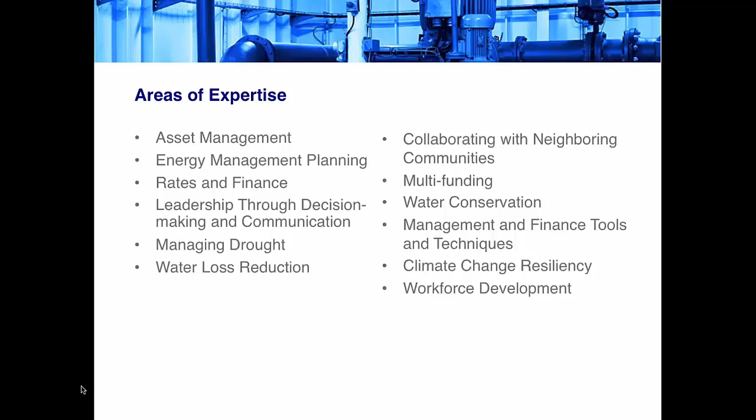The EFCN also has a small systems blog. You can learn more about water finance and management through this blog. You will have the opportunity to subscribe to this blog at the end of the webinar.

In addition to workshops, direct technical assistance, and webinars, as part of the Smart Management for Small Water Systems project, we are also creating a table that lists the major funding sources for drinking water infrastructure projects in each state and territory. Here's how you can access those tables.

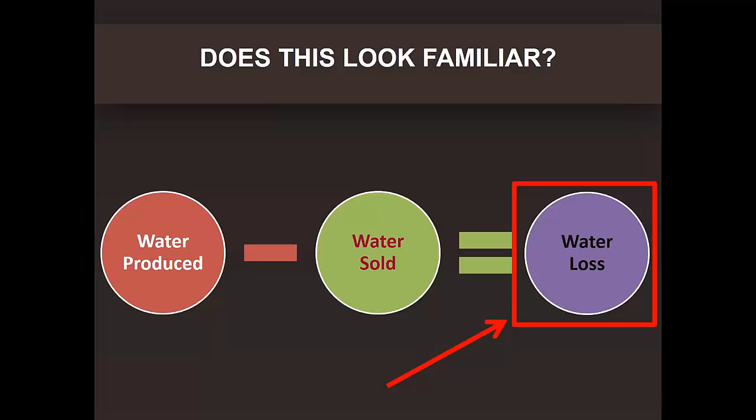So does this look familiar? You have water produced, you subtract the water you sold, and you get some value that is often referred to as water loss. The question is, what does that value actually represent?

There are 6 answers on the screen, from water leaking from pipes to unaccounted for water, data practices, etc. If in your mind you think that value represents unaccounted for water, we want to hope to dispel that from now on. We're not using that terminology anymore.

The water loss community has decided that what we really want to do is account for where all of our water is going and be able to deal with it. So don't think of that value as unaccounted for water, as that is now outdated and no longer used terminology.

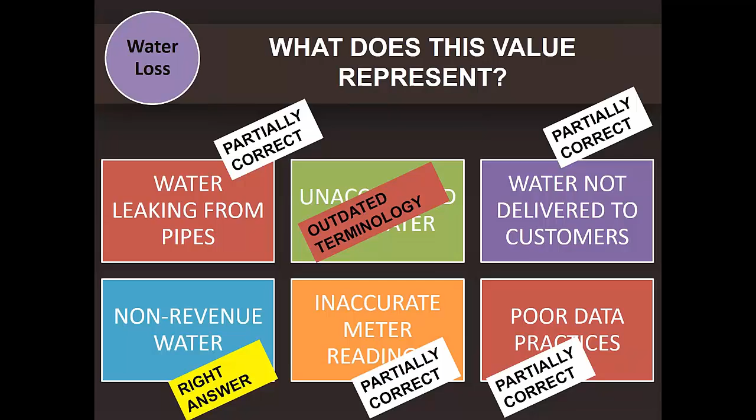Then there are 4 answers that are partially correct, because all of those are components of the correct answer, which is actually non-revenue water. So what we want to try to think about is when we take our water produced minus our water sold, what we really have left is non-revenue water, or water that we're supplying into the system, but we're not receiving any money back for.

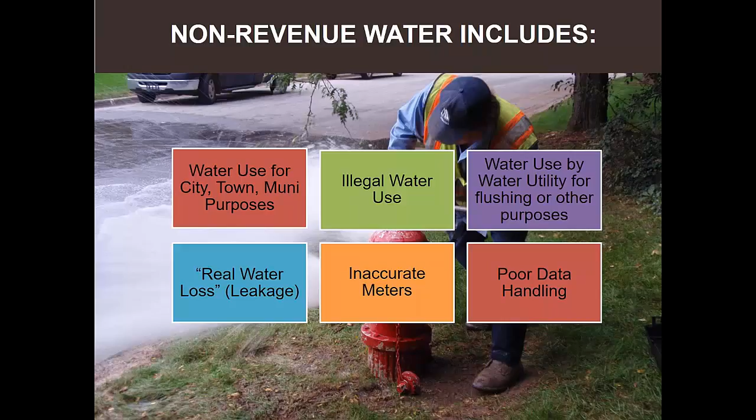So non-revenue water includes all kinds of things, like the water that you use for the city, town, or municipal purposes for which you're not billing, illegal water use, so people who are stealing water from your system, water use by the water utility for flushing or other purposes.

Also poor data handling practices, inaccurate meters, and then finally real water loss, which is actually leakage from pipes, overflow from storage tanks, or leakage from service lines. So non-revenue water includes a lot of things.

Now, why do we care about understanding what our non-revenue water is and where it's going and what category it's in? Well, a lot of that has to do with the fact that there are different tools, and in fact very different tools, that are applied to address different components of non-revenue water.

For example, if your problem is water theft, tools that address real water loss are not going to be effective. Or if your problem is inaccurate meters, again, tools that address real water loss are not the correct tool. So if you apply the incorrect tools, you may waste some money and you probably won't achieve the results you want. So it's really important for us to understand what non-revenue water is and what categories it falls in.

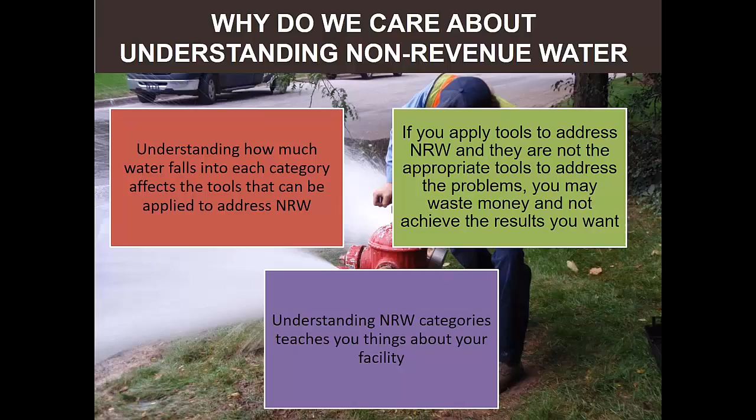There's one last reason, and it may even be more important than the other 2: when you start trying to understand where your water is going and what non-revenue category it's in, you're going to learn a lot about your facility. You can't really do this sitting in a corner and not talking to others at your utility, because it involves management, finance, and technical aspects of your utility. So you really need to learn a lot more about your utility to effectively manage non-revenue water, and I think that's as important as anything else, is the ability to learn about your system.

So what we see on screen now is a water balance, and this is balancing the water that you put into the system with the water that you take out of the system. On the left-hand side is our water supplied, and on the right-hand side is the water that we deliver and use within our utility.

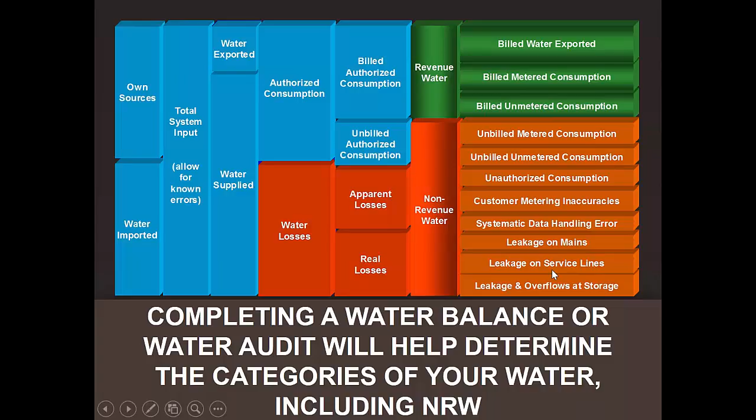If you look at the categories that are in green, those are the ones that generate revenue for the facility, and the ones in red and orange down at the bottom are the non-revenue categories.

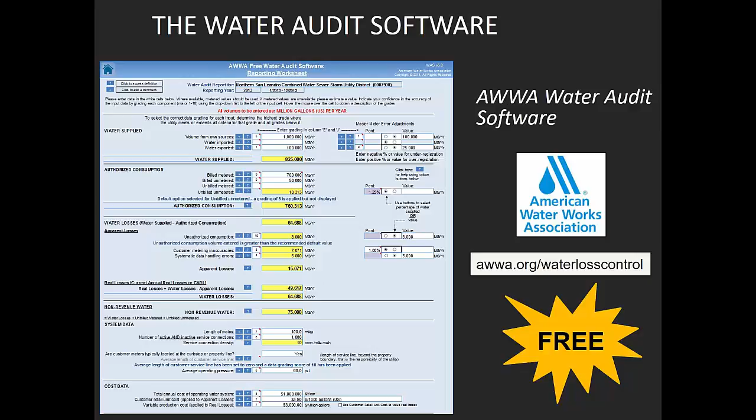Now the water balance in this format may look a little scary, but AWWA, the American Water Works Association, has created a water audit software that makes it a lot easier to figure out the components of your water balance. It's a lot easier to enter your data and information into their water audit software tool than it would be to actually complete the balance in the format I just showed you.

What's really nice is this tool is free on the American Water Works Association webpage. You can access it at awwa.org/waterlosscontrol, and you can download for free the latest version of the free water audit software.

Moving on to part 2, what data will you need if you want to undertake a water audit process? It might feel overwhelming, but if you break it into smaller pieces, it's not nearly as bad as it first appears. The data you need fits into 5 categories: water supplied, water delivered to customers, system characteristics, financial information, and other information that's nice to have but doesn't directly get entered into the water audit software. We're going to go into each of these 5 categories of data.

Today's focus is gathering the data. We have a companion webinar on March 22nd where we'll look at getting your information out of the data you have and putting it into the spreadsheet. Today's webinar will talk about the types of data you need to collect, and on March 22nd we'll talk about how you pull that data out of the information you have and enter it into the spreadsheet.

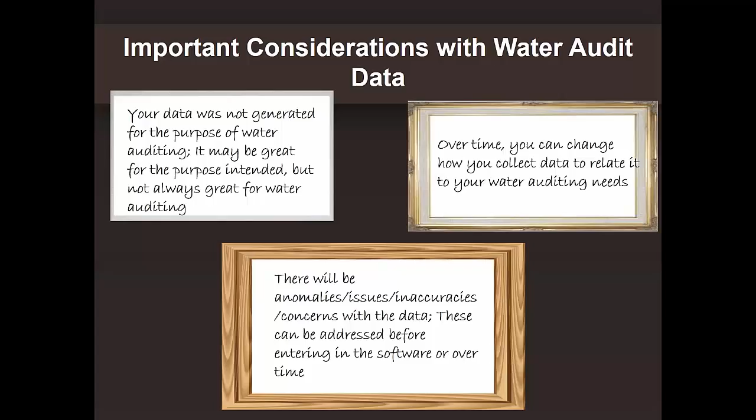Keep in mind that sometimes the data might not be in the format you want, and because of that there might be anomalies, issues, inaccuracies, or concerns with the data. You can address some of these concerns before you enter the data into the software, and others you'll have to address over time by changing the way you collect or use data. You may want to think about how to change the way you collect data to make it more related to your water auditing needs. The way you collect data now may be different in the future when you get more into water auditing. But for now, just keep in mind your data wasn't probably generated for water auditing purposes, and you may have issues to address going forward.

Another thing to think about is how do you collect your data? Do you collect it by hand, meaning written on a sheet of paper? Do you collect it electronically? Do you do some of both? And where do you store your data? Is it easy to find, or hidden away somewhere? Is it on a computer, in a file cabinet? You'll have to think about this as you go through the process of collecting all your data, and that's another thing you may want to change in the future. You may want to start storing more data electronically if you haven't already, or collect data in one single place, as opposed to some data in the pump house, other data in an office, and still other data in the back of a truck somewhere. As you get used to the types of data you need, you might change how you store and keep that data.

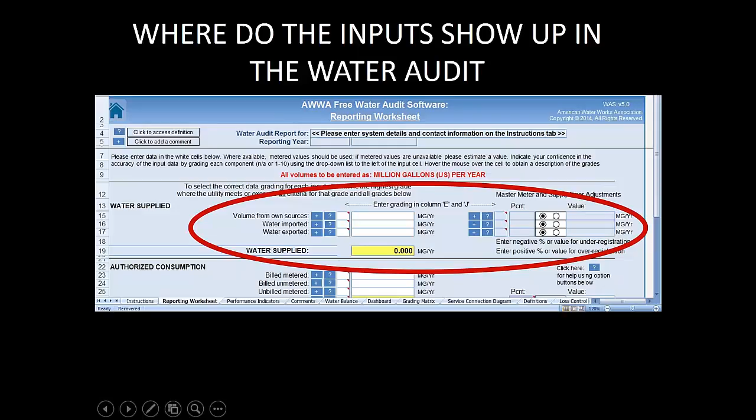So what we'll focus on now is data for water supplied. If we go back to the balance quickly, it's the yellow box on the left-hand side of the water balance that we're talking about. And if we look at our AWWA water audit software, it's the first section of data we're going to enter, in the category water supplied. We'll focus more on entering data into the water audit software in the next webinar.

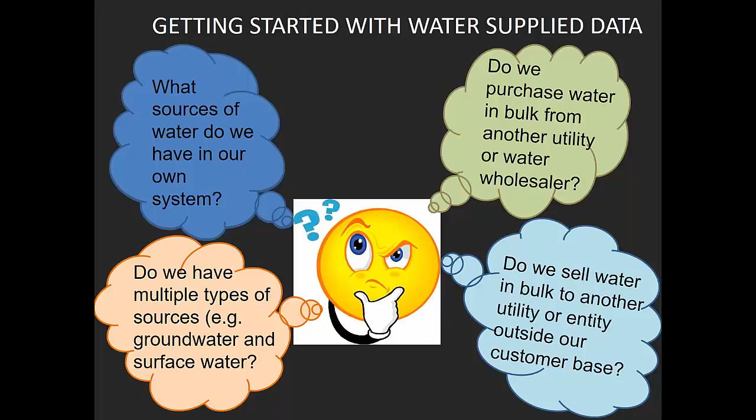To get started with our water supply data, we want to think about what sources of water we have in our system—our own sources. We want to consider whether there are multiple types: do we have both surface and groundwater? Do we have wells? Springs? How many of each do we have? We also want to think about whether we purchase water in bulk from any other utility or wholesaler, and whether we sell water in bulk to any other entity or outside customer.

So we focus on our own sources first. We want to ask: how many sources do we actually have? How many wells, water intakes, springs? And a really important question—is every one of those sources metered individually? Do we know how much water each one provides? If we don't have them all metered, how can we estimate what we're producing from those wells? We might have to use pump run times, but that won't be as accurate as having an actual meter.

The next question is, how often do we read each of these meters? You could read them monthly, daily, or quarterly, but the more often you read them, the better information you'll have, and the more quickly you can respond if there are any problems. We'll talk more about that in a few minutes.

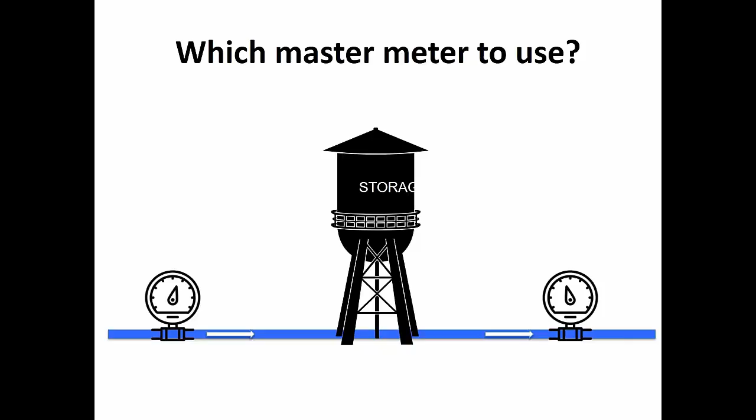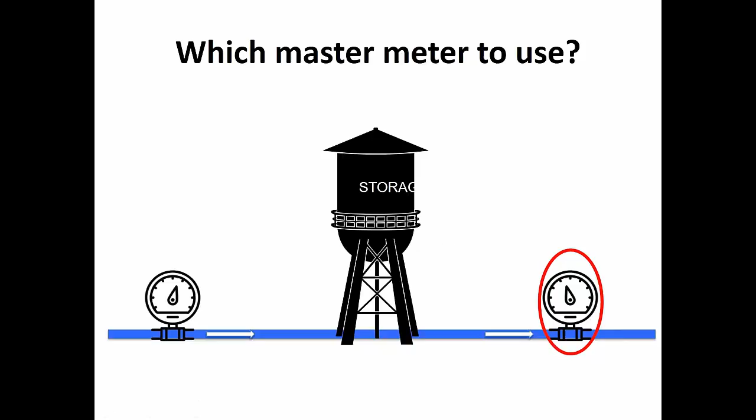They should use the one after the storage tank, because the storage tank, as it draws and fills, can change the volume. On an annual basis, using water audit software, it won't make a big difference, but if you want to look at things month-to-month, it could have a major impact. So think about where your meters are and what water is going in and out of those meters when deciding which ones are best to use for water audits.

Here's another example of a system we worked with—a surface water system. They have a treatment facility. The water leaves the facility, goes into the storage tank, and is metered on the way in. On the way out, some water returns to the facility for backwash, while the rest goes out to distribution, where there's another meter.

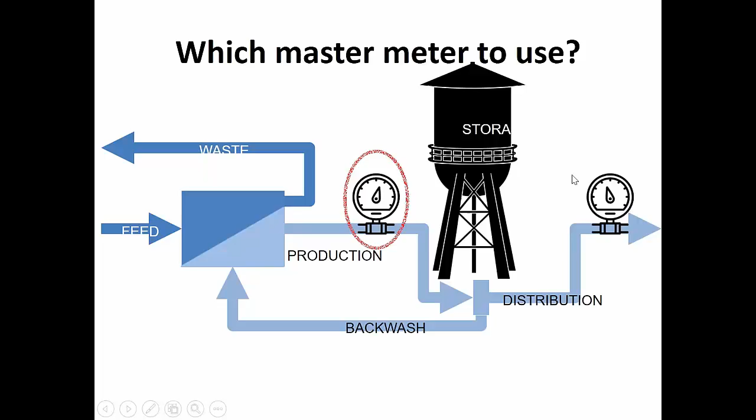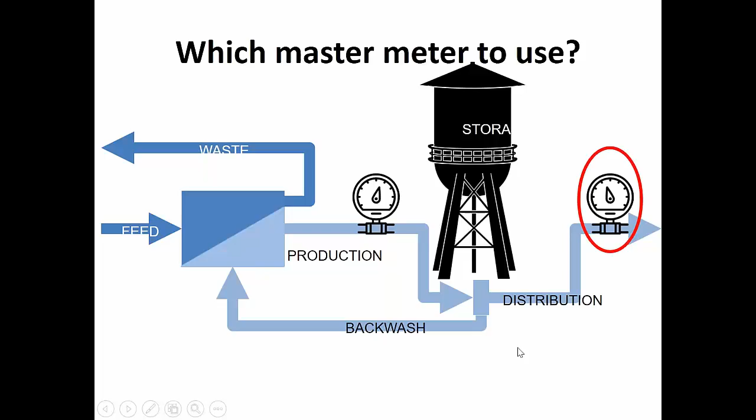This system was using the meter prior to storage, but the problem is it wasn't counting the backwash water, which wasn't being metered, so they introduced an error into their water audit. What we really want to do is use the meter going out to distribution. So again, think about where your master meters are when deciding what data to use.

So the question would be, what are the downsides to reading your master meters monthly as opposed to daily? Well, if you're reading them monthly, you might miss something that happens in the middle of the month. For example, if your meter stopped reading for some reason, you wouldn't know that.

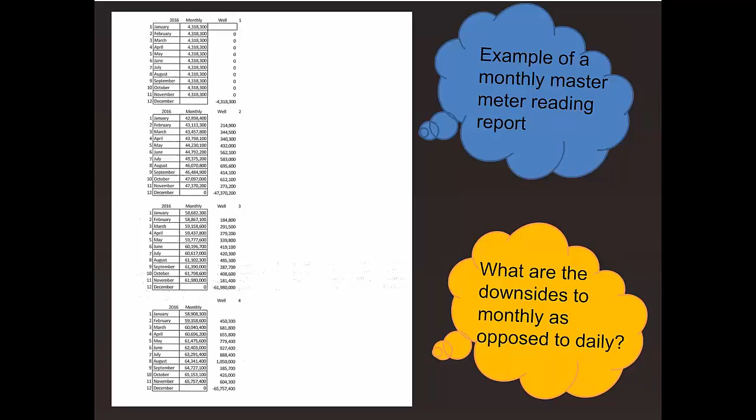Or if it was a SCADA attached meter and the SCADA reading went out during an electric storm for a couple of days, you wouldn't know that if you just looked at the monthly meter reading. Especially if it was an intermittent thing that happened one day and not another, if you just looked at the bulk value, you might miss something that happened on a given day.

You also might miss a huge spike in the amount of water coming out of your facility, maybe a leak or other problem, and you wouldn't know that if you wait a whole month versus doing daily readings. So it's much better if you can do daily readings. That gives you a lot more information about your system. It isn't that you'll put all the daily reads into your water audit software, but the daily reads will teach you about your system.

Here's an example where the data has been tallied for the whole year, so what was used January through December was tallied up with a total for the year. This is really helpful when you're getting ready to enter the information into the software, but you want to make sure you have the backup daily readings to go along with this. So if any month doesn't look quite right, you can go back to the daily readings and see what's happening and try to troubleshoot the data.

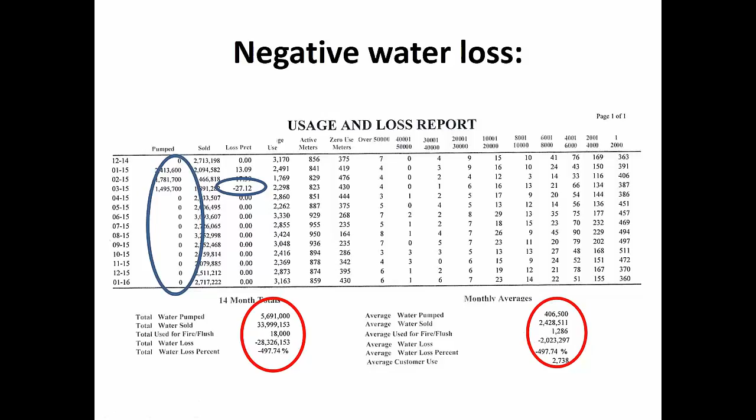Here's a case where this particular utility had a negative water loss. They did the water balance and couldn't figure out why, but going back to their data, they had several months where they had zero and just hadn't realized it because they weren't connecting with the data source. So they had to go back and really estimate for the time being, and in future years make sure they were checking the daily reads and monthly reads, filling in their data, because this creates a huge problem in your water auditing.

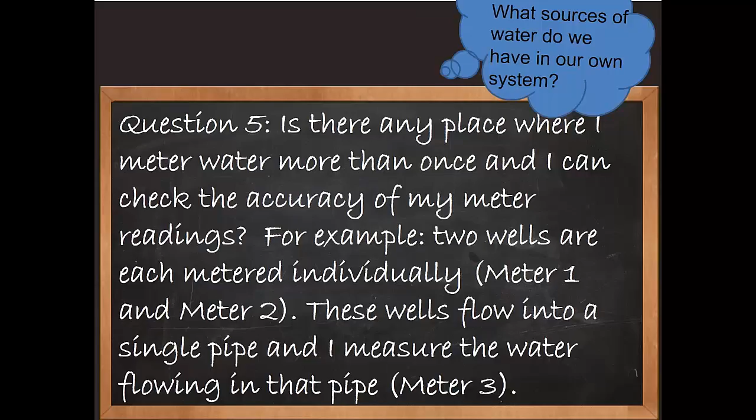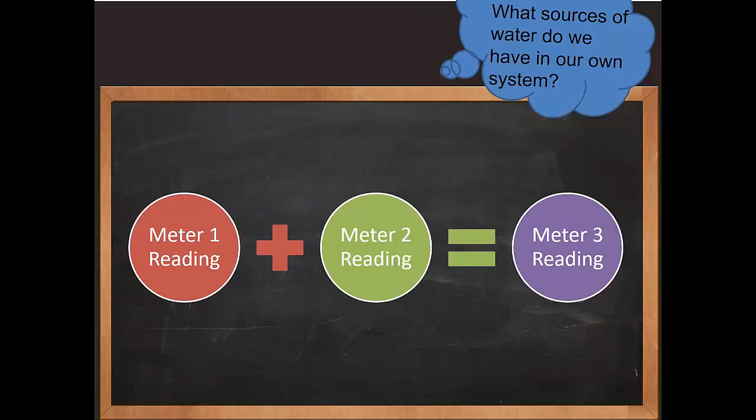Another question you can ask yourself is whether there are any places where master meters come together to add up to a third meter. For example, you might have two wells that flow together and there's a meter on that other pipe, so meter reading 1 plus meter reading 2 equals meter reading 3. These kinds of opportunities give you a chance to do a check on your meter readings.

It's not as accurate as doing an actual test of your meters, but it can give you some information about whether or not your meter readings are accurate. So if meter reading 1 plus 2 doesn't even come close to meter reading 3, we know there's a problem somewhere in the meter readings, and that might give us a clue that we need to go out and investigate our meters to find out which one or ones are reading inaccurately.

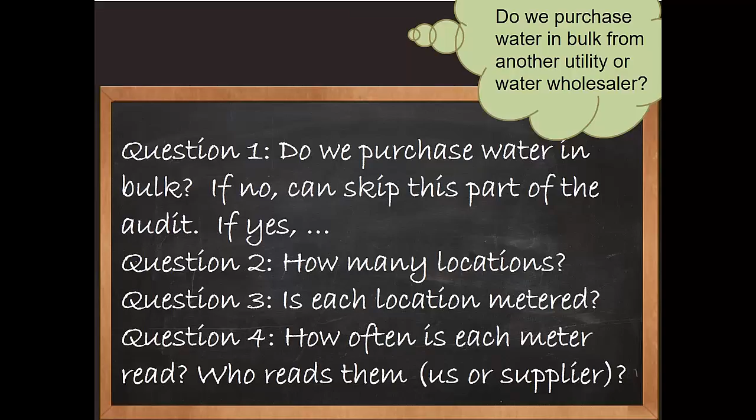Let's move on to what if we purchase water in bulk from another water utility or a water wholesaler. If you don't purchase any water of this type, you can skip this part of the audit. If you do, ask yourself how many locations there are, is each location metered, and how often do you read those meters? You also want to know who reads them - is it you, or the person supplying the water?

If you never read them, if it's always the person supplying, you might want to get somebody to read the meter from your own system as a double check, because there are ways meter readings can be wrong, and the more often you read, the sooner you might find out there's a problem. So it would be a great idea to do daily reads of these meters, and if you can't, at least weekly reads, just to make sure everything is okay.

Again, this is great data for the water audit, but you would want to have the backup information from daily reads, monthly reads, weekly reads, whatever kind of readings you have, to double check, because otherwise you don't really know how accurate that information might be.

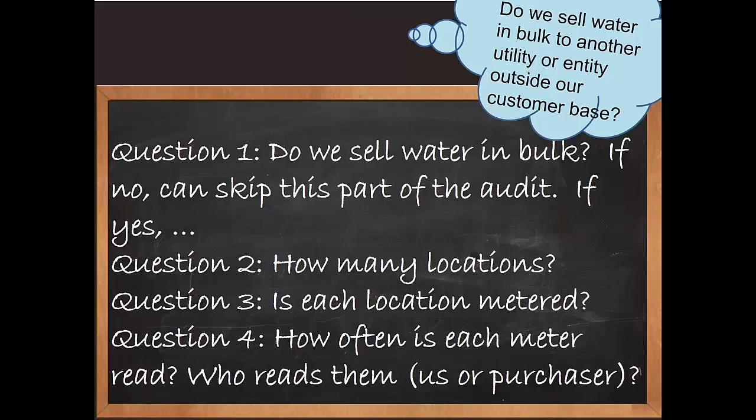So on the other side, we talked about buying water into your facility. The other side is selling water out of your facility in bulk. If you don't do this, you can skip this part of the audit. If you do, again: how many locations, is each location metered, how often is each one read, and who reads them—similar to purchasing.

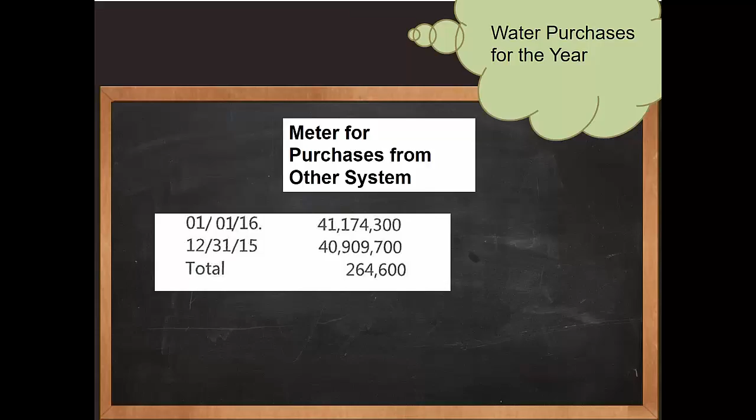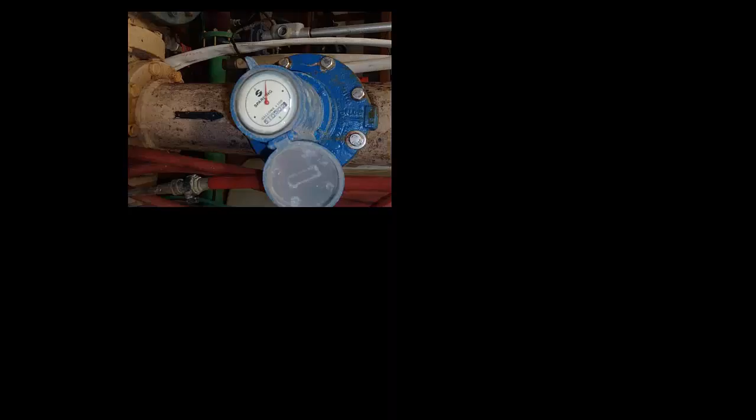Next we want to talk about your master meters and whether or not you've ever checked your master meters for accuracy. The most important number in the water audit is really the water you supply, because that sets the whole rest of the water audit and will have a big impact on what your bottom line non-revenue water and real water loss numbers are.

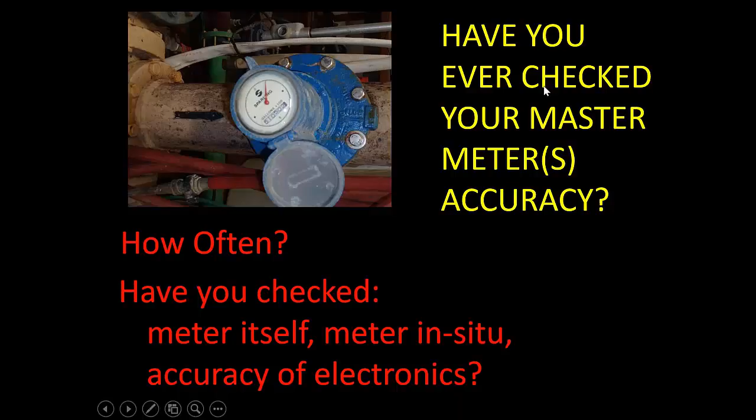So you want to make sure that your meters are accurate. Ask yourself: have I ever checked my master meters for accuracy? How often? I want to check three different things: the meter itself to see if that's reading accurately, how it's reading in its location, and the accuracy of the electronics associated with the meter. If there's something sending a signal to SCADA or to a remote printout, is that reading correctly? So there are three different areas where you want to check the accuracy.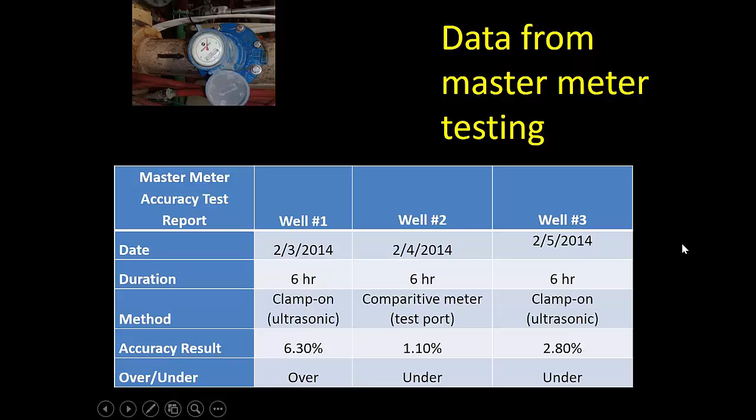We'll talk more at the next webinar on how you aggregate that into one result, because you can only put one accuracy number into the water audit software. So that's something we'll talk about more, but in the meantime, you want to gather any data that relates to master meter testing.

The next part is we want to talk about data for the water we deliver to our customers. So where does this fit in the balance? This fits in the balance in the top right, and you'll notice all of the revenue water fits in there, but so does a little bit of the non-revenue water—this is authorized consumption that we don't bill for.

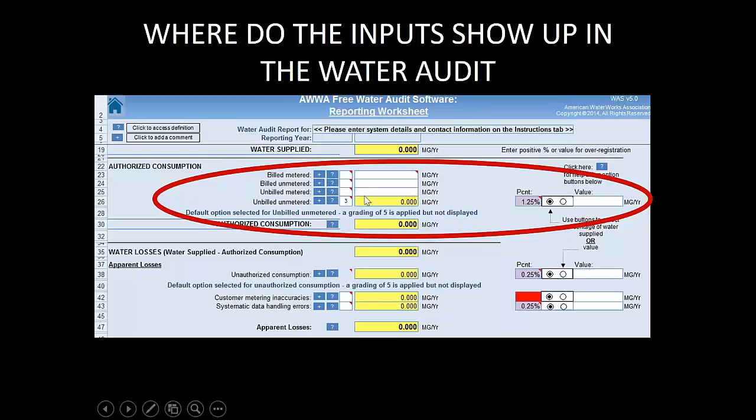So where does this show up in the water audit? It shows up in the second component, under authorized consumption. When we get started with this data, we're talking about your customers: is every customer metered? Do you read the meters on a routine basis? Do any customers have a meter but not receive a bill? And is your water usage for non-customer purposes—such as flushing, fire flow, cleaning—do you estimate or track that water in any way?

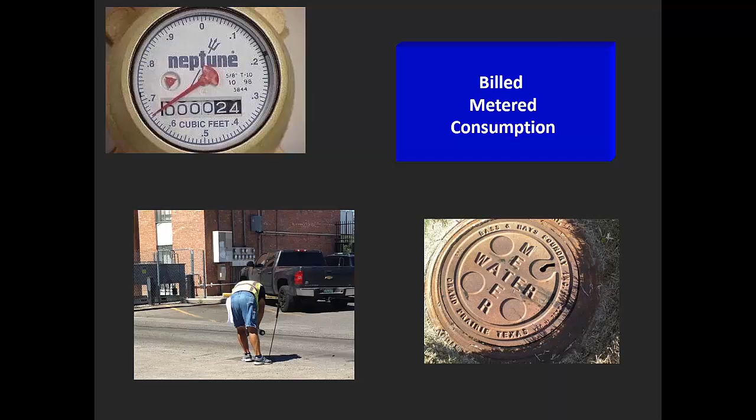For our billed metered consumption, this is the primary source of revenue in our water system. We have customers, we bill them, we meter how much water they're using.

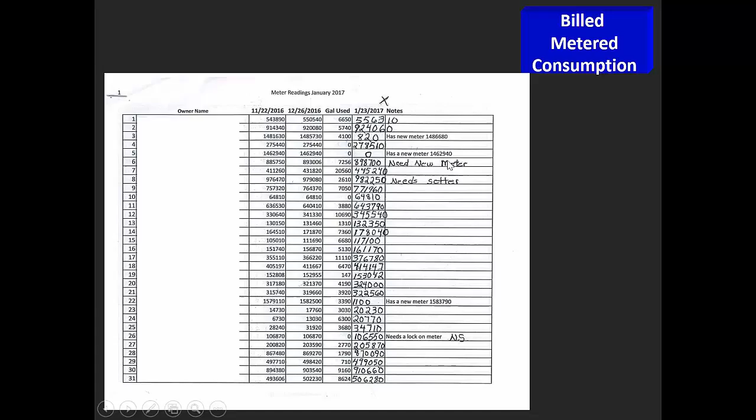Here's an example of meter reading data: the last read, the last two reads, the gallons used for that month. They print out the report, and the operator or meter reader writes in the new result, with a chance to make notes for any issues that might come up. Another example is a monthly meter reading sheet with the past read and the new read, and again a chance to write some notes.

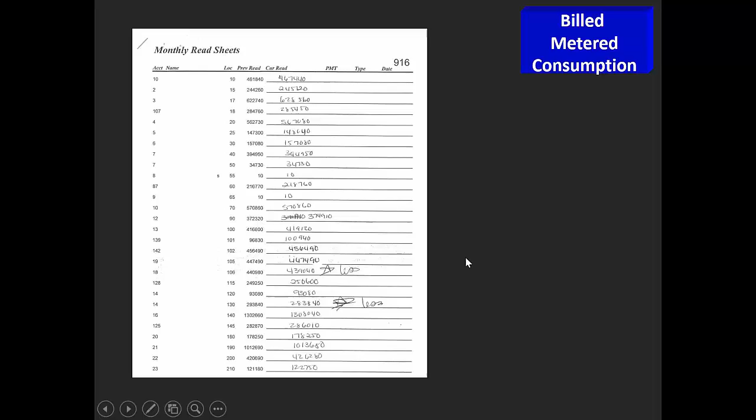If you don't have those kinds of records, you might have to get them from your billing system. Here's an example of a billing report that would show usage for the month. You could get a report like this for every single month and use it to help you gather how much you have billed and metered to your customers.

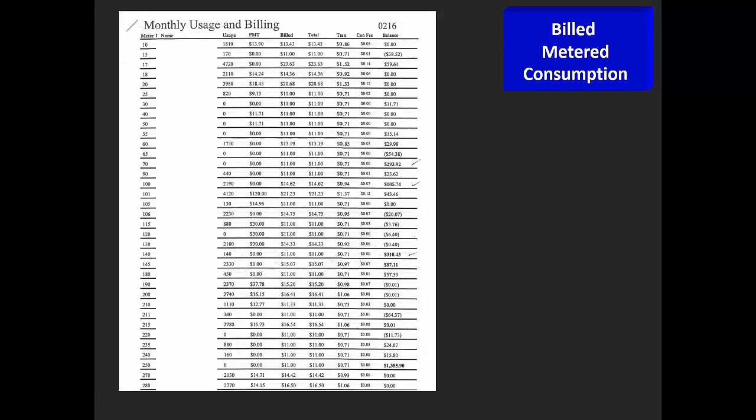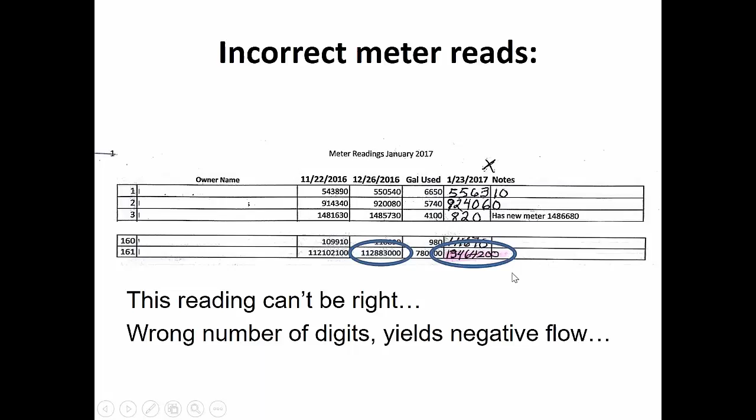Here's an example of why you need to be keeping track of your meter readings and really look at it. This is a case where they took the worksheet with the past 2 months, filled in the new month, but had the wrong number of digits. This particular case yielded negative flow, probably just a mistake in writing down the result. So it's always good to double check the results and see what's happening, because you might have an incorrect meter read.

Moving on to billed unmetered consumption. These are customers that have a bill, but you don't meter them, so they're just getting a flat rate, maybe paying $30 a month or $20 a month or something like that. In these cases, it's very difficult to estimate how much your customers use, because it's just a best educated guess.

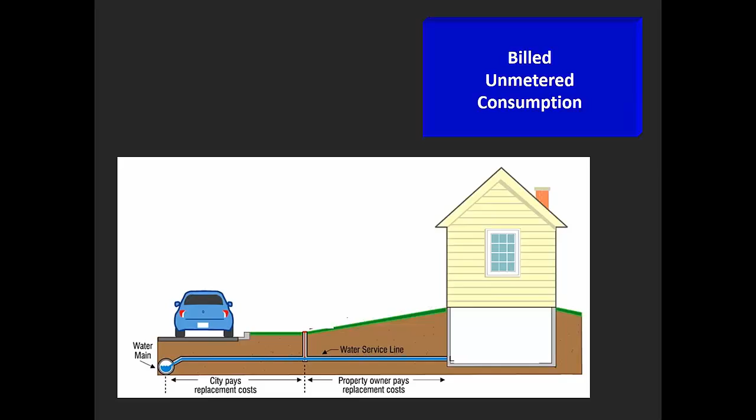Because you don't know, you're going to have to use some data from a neighboring utility that's in your area, since there are big differences between, say, the desert Southwest or the Northeast or the Midwest and how much water people use. Try to find decent metrics for what a typical household uses and use those kinds of averages to guess. Hopefully, in the future, you can move towards a metered system so that you can have better information about how much your customers use. Even if you want to keep the flat rate, it's still a good idea to have information about how much

water people are consuming. For unbilled metered consumption, what we're talking about here is somebody has a meter and does not get a bill for that. So the question is, do you read those meters? If they're not getting a bill, the tendency is to say, well, I don't need to read them. But for water auditing purposes, it's very important to know how much water is going out that way.

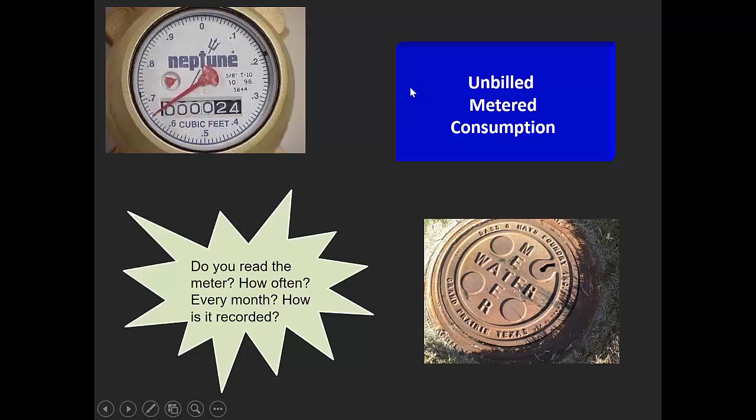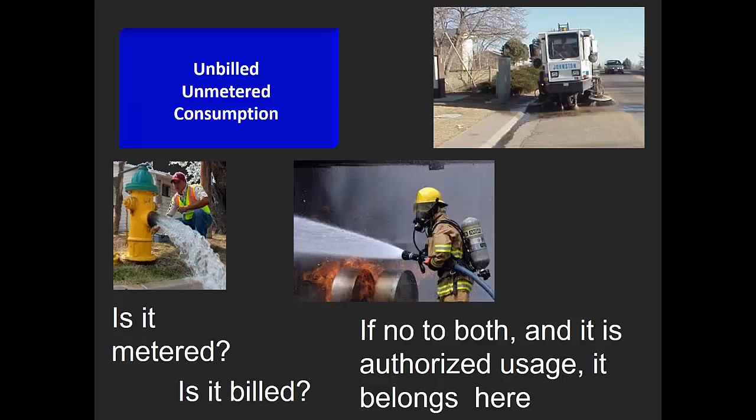So how often do you read those? Do you read them every month? Do you record those readings? Are they included in your billing system under a separate code, or do you have to save it somewhere else? You might have to ask some questions of your billing department to see if they even track it in any kind of way in their system, how the meter or these readings are done, or whether you're going to have to keep them elsewhere. This is a very important component because it is a big non-revenue water component.

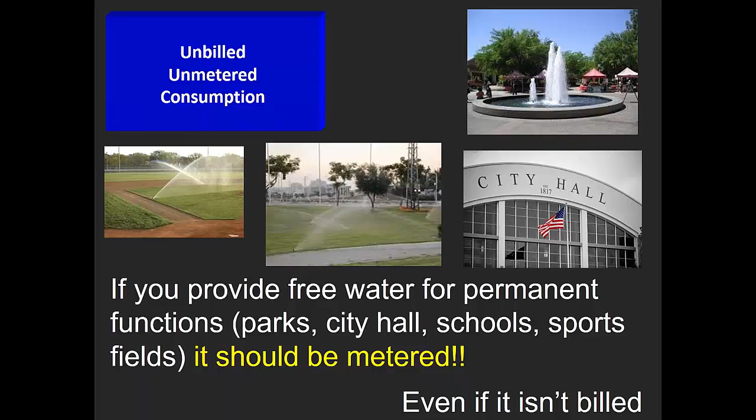Then we have unbilled, unmetered consumption. So to figure out what fits here, we ask the question, is it metered and is it billed? If the answer to both of those questions is no, then you ask, is it authorized? Is somebody allowed to use that water? If it is, it belongs in this unbilled, unmetered category.

One thing to think about is you may have uses such as parks, city hall, school, sports field, etc., where you're providing them free water. If they're not currently metered, you want to meter them even if they're not billed. So for any kind of permanent function where you're doing it the same place, the same way, you want to meter those. The things that we want to have in an unbilled, unmetered are mostly things like flushing, fire flow, street sweeping, things that are generally small, sporadic, and not consistent.

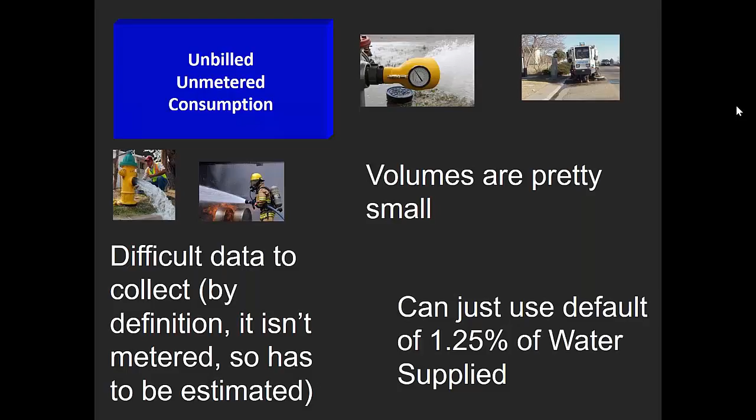This is difficult data to collect because it isn't metered — that's the whole point of this category, is it's not metered. Generally, the volumes are relatively small. If that's not true for your utility, you may have to do a little bit more work to collect this data, for example, noting which fire hydrants are flushed, how long they're flushed, that kind of thing. But there is a default value in the AWWA water audit software of 1.25%. So if you don't know anything else, it's a good idea to just stick with the default at the beginning, and then over time you can figure out ways to collect this data in a better way, and change from the default to a different value.

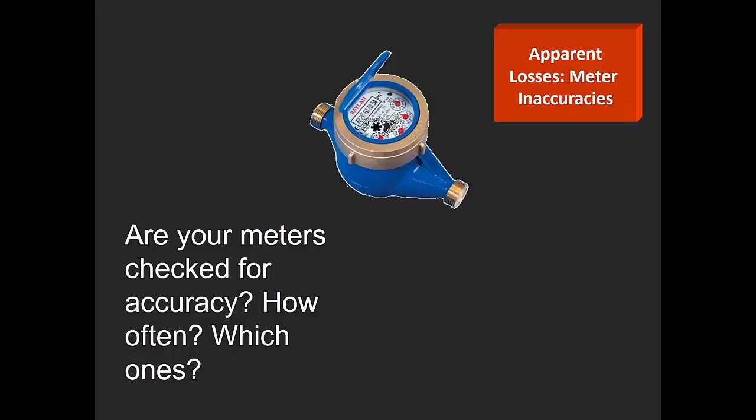Most utilities have way too many customer meters to check every one for accuracy. It would be very expensive and very difficult to do that. So typically you're just going to take a sampling of meters. You also may have a lot of meters that are different ages, different sizes, different manufacturers, and that gets into a lot of other issues. So you want to pick a few from each category. AWWA does have a fair amount of information available for different ways to go about selecting meters for accuracy testing, so that's a good resource for you.

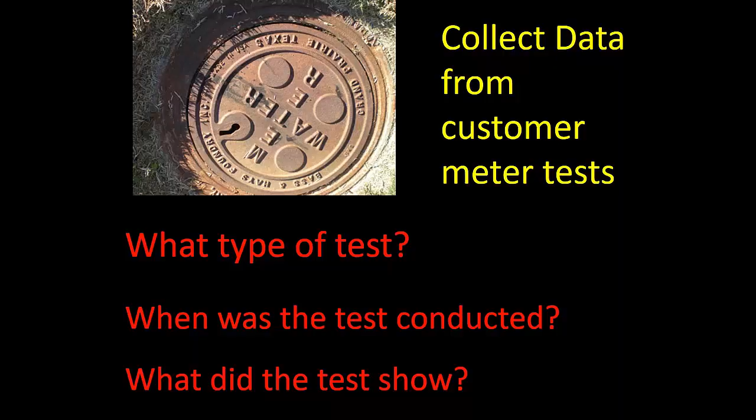If you do have customer meter accuracy testing, you want to collect that data and see what the results were. You're going to again have to find one number for accuracy of your customer meters to go into the water audit. So if you've checked 50 of them, for example, we have to do a flow weighted average to come up with the number to put in the audit software. That's something, again, we'll talk about more next time.

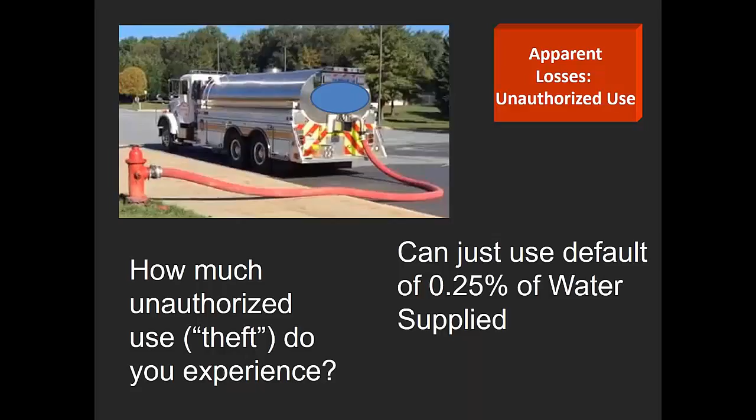If you don't have a lot of this, or you haven't noticed a lot of unauthorized consumption, you can just use the default value that's included in the water audit software. There's kind of an assumption that every utility probably has at least a small amount of theft. If you have a large amount of theft, you may want to do a little more digging to try to have a different value. But if you're just sort of routine, and you don't come up with a lot of unauthorized consumption, then just go ahead and use the default of 0.25%, which is already included in the software.

And the last apparent loss is data handling errors. So you can institute or cause errors in your data by how you handle it. When you're transposing or transcribing information from handwritten into electronic, or if you have a SCADA system and the data is not transmitting correctly, there can be some errors that come into your data. Until you get more familiar with your data, it may be hard to find these. So there, again, there's a default value of 0.25%. At the beginning, that might be the best place to start, and then as you go over time, you might change that.

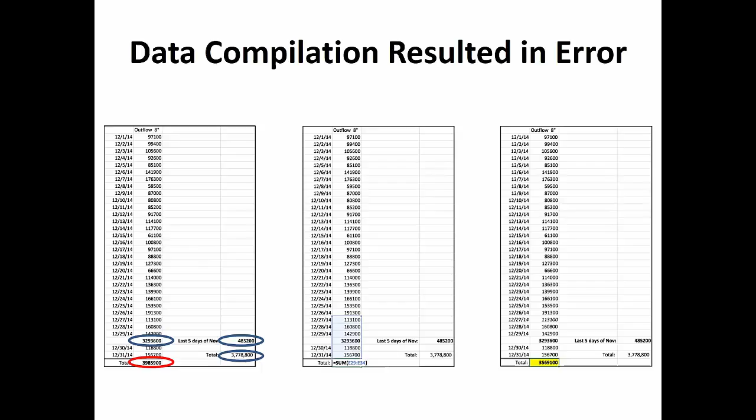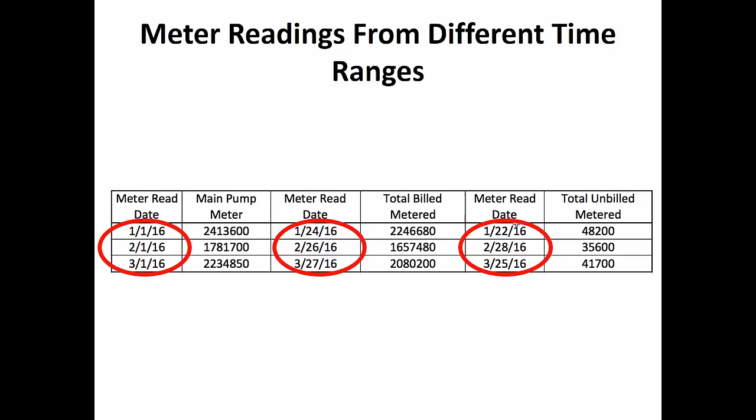So here's just an example, some examples of data errors, just to show you. These aren't necessarily things that you have to put in your audit, but I just wanted to show you how errors can occur. This is an example where a utility was trying to match meter reads with production meters, and they were offset. The cycle they read the customer meters was different than how they were reading the master meters, and they introduced quite a bit of error on a month-to-month basis, trying to take 5 days here and add it to there. So in the process, they introduced a lot of error in how they were comparing their production meters to their customers.

This is another example, a utility that was trying to do month-to-month looking at their utility and how the water loss went, but they had very different meter reading cycles. They did different cycles for billed and unbilled, so it created a lot of errors, or potential for errors, in how the data was handled because there were mismatched time frames.

Moving on to system characteristics, where does this fit? It actually doesn't fit directly. It's an indirect inclusion in the water audit. It will show up in the system data portion of the water audit. So when we're looking at system characteristics, we're looking at whether or not you have a map to know where your pipes are located, if you know how many fire hydrants you have, where your customer meters are located, your system's pressure, and how many connections and customers you have.

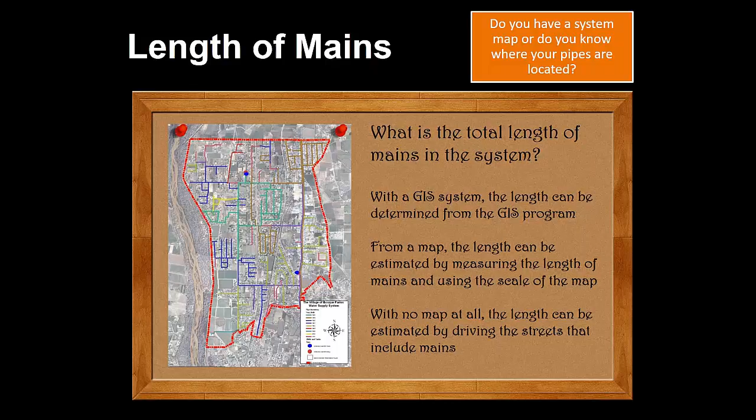So starting with length of mains, the water audit software wants to know the total length of mains in the system. So with a GIS system, if you have such a thing, you could actually go in and figure out the value from using your GIS data.

If you don't have that, you might have a regular map or a simple map you can use to just measure the lengths, which will give you some idea if you use the scale of the map and the measurements. If you have no map at all, you might be able to just drive the streets where you think your pipes are and use the odometer reading to give you a good guess of how many miles of pipe you have.

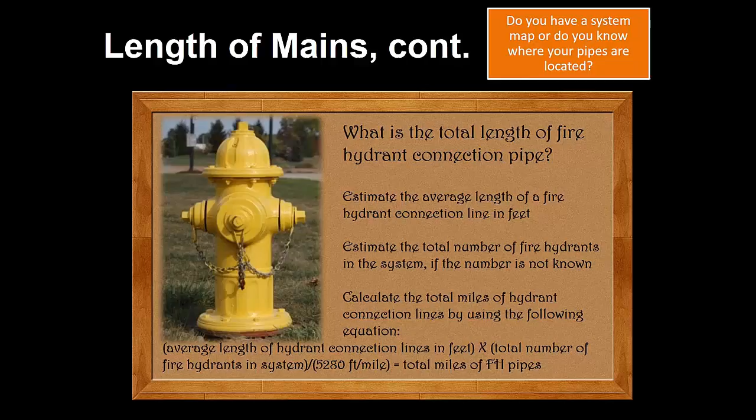In addition to knowing the total length of pipe, there's also interest in having the fire hydrant connection pipe added to that. You can do this by estimating the total number of fire hydrants in the system, then estimating the number of feet between the main lines and the fire hydrant as an average across the system. Then you multiply the number of fire hydrants by the number of feet of pipe, divided by feet per mile, to get the total miles of fire hydrant pipe.

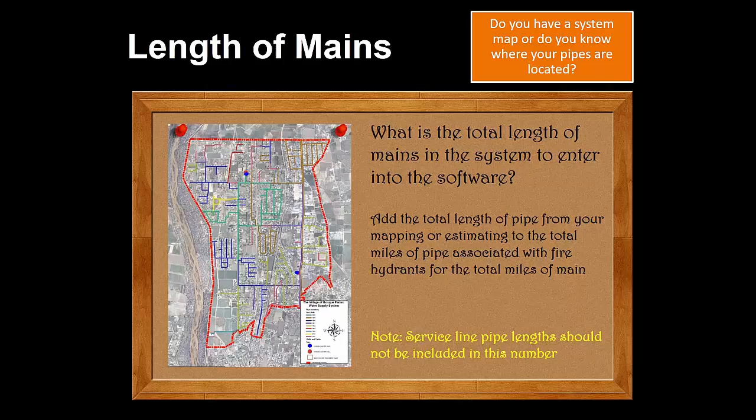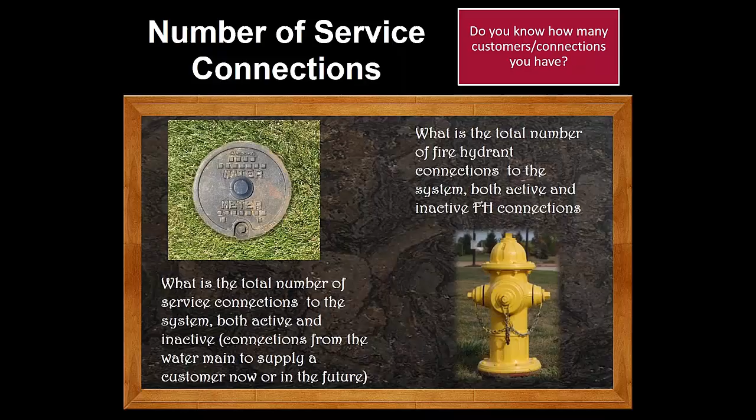To get the total length of mains, you just add the length of pipe to the length of fire hydrant connections. If it becomes too difficult to deal with the fire hydrants, a good starting point is just to focus on the total length of mains, and in the future you can add in the fire hydrant piece.

The number of service connections is the total number of connections to the system, both active and inactive. It also includes the total number of fire hydrant connections, again both active and inactive. So you want to count up every time you have a connection to your system to get the total.

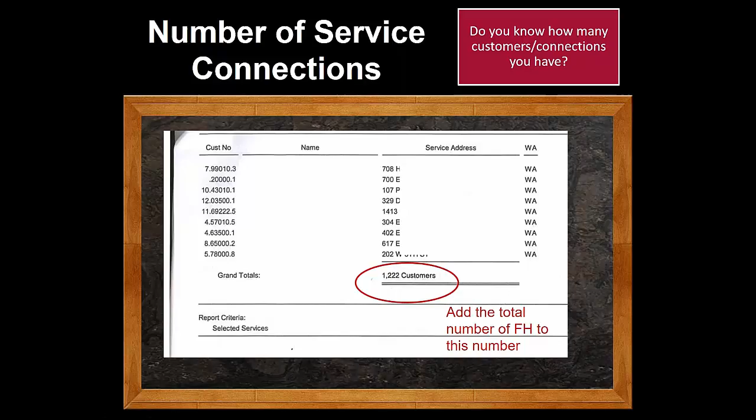So again, in this case, the total number of fire hydrants plus the total number of connections is what you want to enter. Here's an example of a utility that just used billing software to add up the total number of customers, which can be added to the fire hydrant number to give them the information they need. There are different places you can look to figure out how many connections you have.

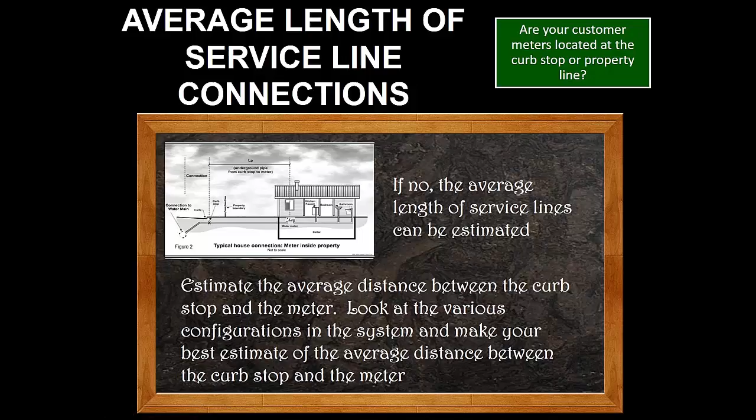The average length of service lines relates to where your customer meters are located, whether at the curb stop, property boundaries, or in the house. If they're at the curb stop or property boundaries, the average length of service lines is considered zero. If not, you have to come up with an average service line length. There's quite a bit of information within the software and related materials on AWWA's website to help you decide, since you can have a lot of variation between where the curb stop is and where the meter is located. You'll have to come up with an average across the system to figure that out.

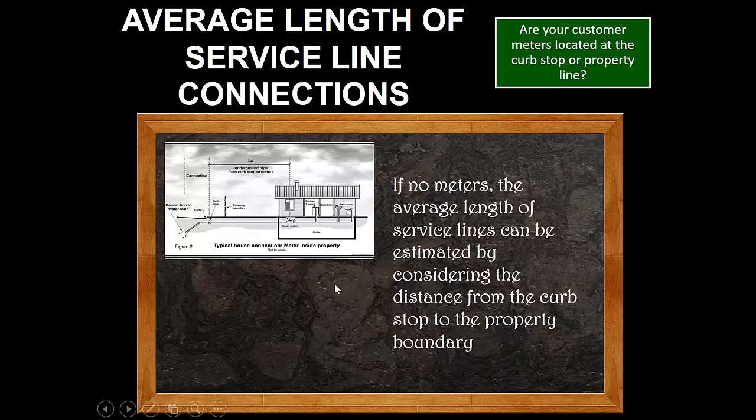If you have no meters at all, you have to consider the distance from the curb stop to the house, similarly assuming there would be a meter in the house. It's the same kind of calculation.

The average system operating pressure is a number where we're looking for one average across the entire system. Generally systems have a wide variation—you can have different pressure zones, and there can be differences based on where you're located near tanks or different elevations in the system.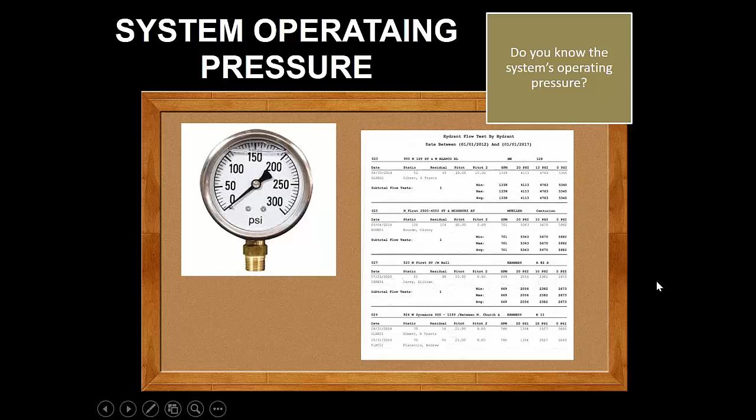If your engineer has done a hydraulic model for you, they may be able to provide the average pressure. If not, you can take pressure readings across your system and estimate an average pressure. You can also use information like this, static pressure readings from the fire company where they've gone out and done testing, to estimate a system operating pressure.

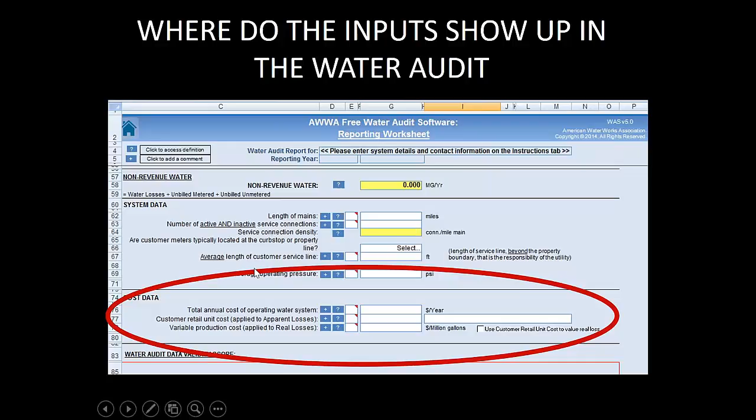For financial information, this is a similar case where it's not directly included, it's indirectly included, and it's at the bottom of the audit—the last part of the audit under cost data.

So what you want to know here is the total cost of operating the facility, the retail cost of water, so the dollars per 1,000 gallons, and then the variable production cost of water, the dollars per million gallons to make it.

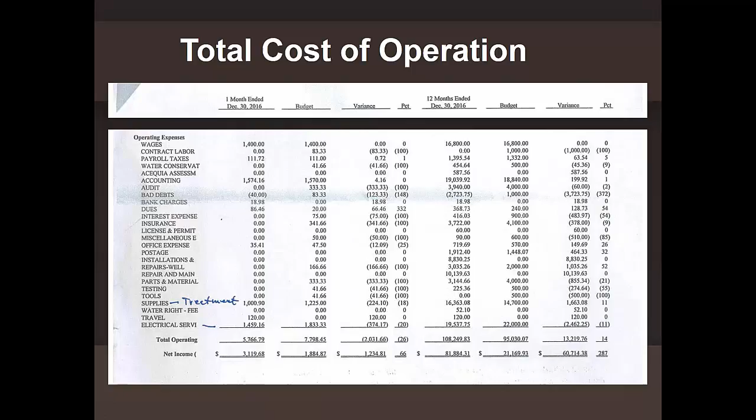So here's an example of a budget sheet. If you look at this, you can see the totals that you spent for the entire year, which can give you information for the total cost of operation.

Your rate structures will help you figure out the dollars per 1,000 gallons. And again, we can only put one number in, so we have to do a little bit of math sometimes to flow weight average the dollars per 1,000 that we want to use.

Then the last part, the variable production, we want to look at energy use and chemicals. So we want to gather data that looks at how much did we spend on, say, sodium hypochlorite or gaseous chlorine or chlorine dioxide or whatever we've used. We want to look for those costs.

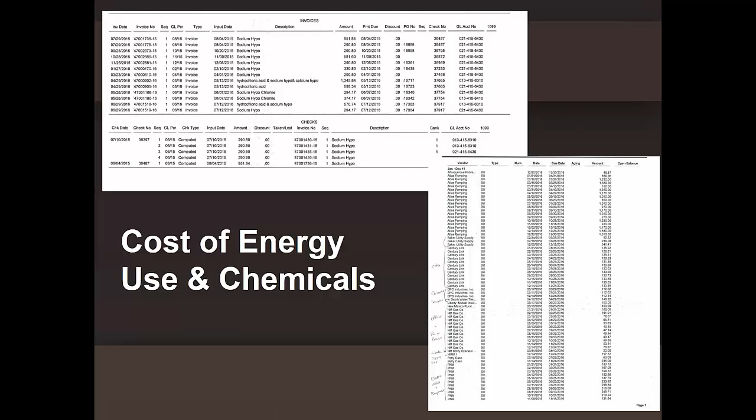Maybe they're in a billing system, maybe they're in an accounting system, maybe you just have a list of everything you spent. In this case there's a lot of things they spent, and you just pick out the energy use. And you want the energy use for the utility, the treatment facility, and not the energy use for your building if you have one.

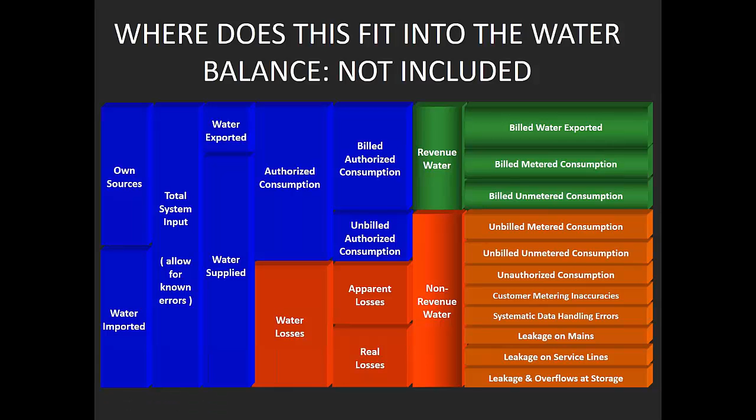Finally, other information that you might want to include in your data gathering efforts. None of this fits directly within the water audit, but it's very helpful as you try to deal with what to do about the non-revenue water. So it is not directly included in the water audit.

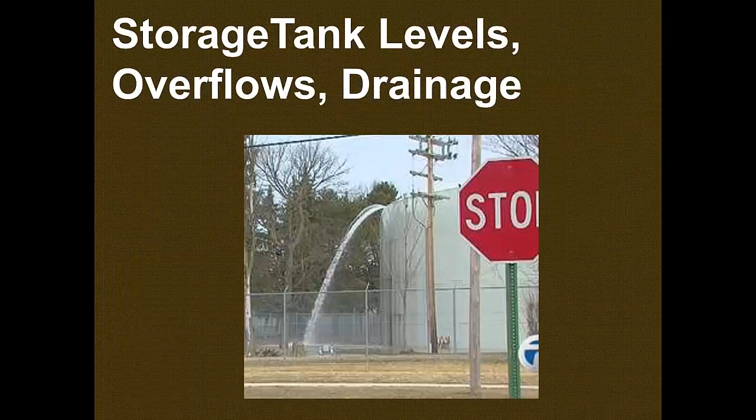One piece of information is break data, both main lines and service lines. You'd want to collect data on where, what kind of pipe, what day, that sort of thing. Any storage tank overflows or drainage you want to collect, and then storage tank levels.

Storage tank levels are much more important if you're looking for shorter time frames. Like if you want to look at things over a month, you wouldn't use AWWA software, but you could track your water loss on a monthly basis. But then we need to know the tank levels.

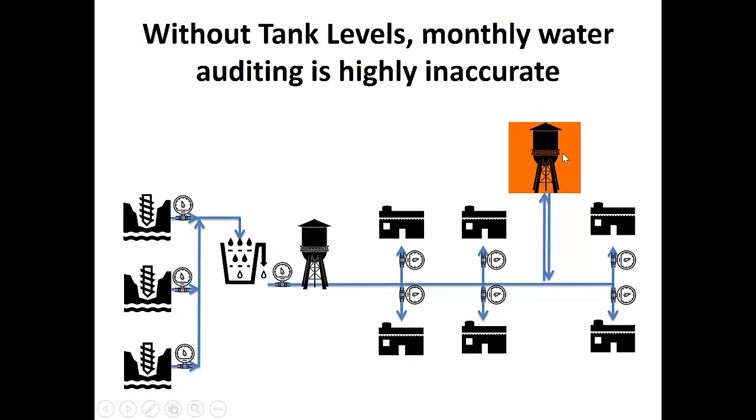Here's an example of a system that has a few wells and a couple of storage tanks. If they don't consider these storage tank levels, it can really throw off the audit when you're talking about it on a monthly basis. It matters if the tanks were empty at the beginning of the month and full at the end, and vice versa. So you have to start tracking those tank levels if you want to do shorter water loss evaluations.

You also might want to look at the value of water that you're giving away. So if there are people, you know, City Hall, ball fields, schools, whatever, who receive free or discounted water, you might want to figure out what the value of that water is, just so you know how much revenue it accounts for, and people in your elected leadership can make decisions about whether that should go forward or not.

The amount of water or value of water rebated to customers because of leakage in homes is another thing you might want to think about. This is a case where systems may offer rebates to customers, and if they do, because of leakages, how is that water tracked?

You want to make sure that they're not subtracting that out of the total volume, but rather just changing the billing amount. And there are some billing softwares that kind of require you to put it in, to change the volume as opposed to the bill. In that case, you have to track whatever data that is.

So the next step would be, after you gather all your data, trying to get it ready to go into the water audit software, and that would be our next webinar. So join us on the 22nd.